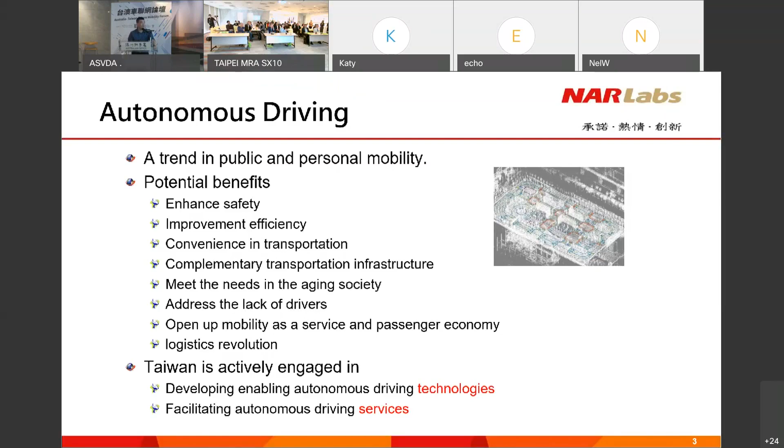However, in Taiwan, efforts are engaged in developing enabling autonomous driving technology and facilitating autonomous driving services. What does that mean? Yes, please.

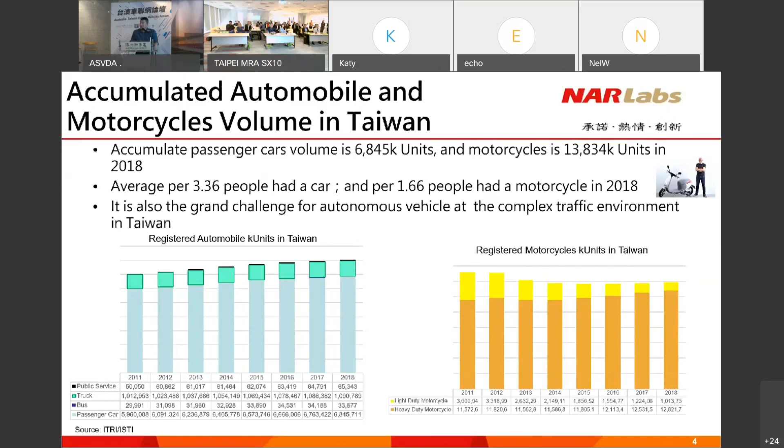This is a statistic result from ITRI. You can see the average: 3 people have a car, and also 1.5 people have a motorcycle. What does that mean?

This is how we deal every day. So we need to deal with car and motorcycle mixing flow. At a traffic light, there are over 200 or 300 motorcycles just behind you. We also have unique transportation equipment, and we also have night markets, flashlights, and people's behavior you can ask them about.

So this kind of traffic scenario, you can see in Taiwan, but not in Europe, or even not in Northeastern Asia, Japan or Korea. They don't have this kind of situation.

This only happens in Taiwan, in China, and in Southeast Asia. But actually in Taiwan, because we only have one car manufacturing company, the advanced Taiwan industry is for electronic devices, ICT industry, and also parts for cars. So if we don't use this opportunity to help our industry develop their ADAS systems or automatic technologies, they can't get into the supply chains in the near future.

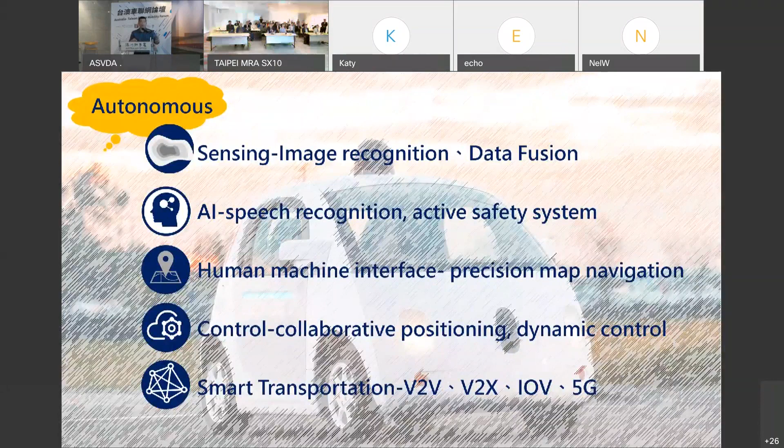Right now we have LiDAR, camera, GPS, and also high definition maps and so on. So what does the data fusion need to deal with, and how can we deal with speech recognition and active safety systems? How can the AI deal with the problem, how can the AI control the car properly? This is a very big issue for autonomous vehicles.

Next, please. For the strategic levels, the value chain development - this is a lack of the dominant OEM or Tier 1 supplier, and we also have a low technology readiness level in some subsystems. And also we have unclear user acceptance for autonomous vehicles.

For tactical levels, this is an environmental and traffic issue for the complicated scenario, highly mixing traffic flow and unpredictable behaviors.

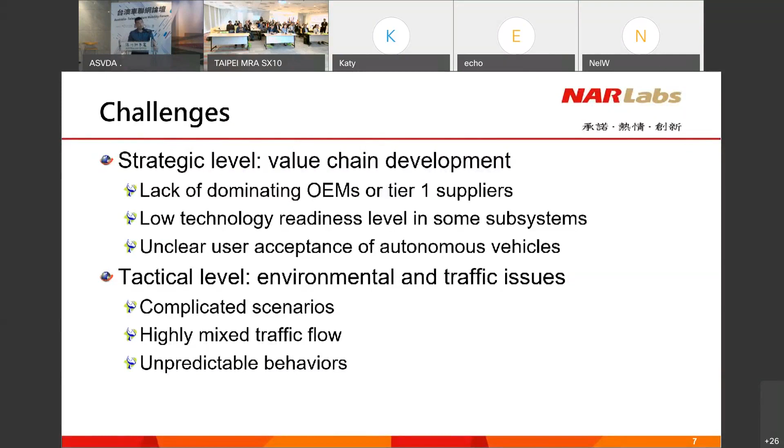And also we need to accumulate data for learning, and also we have experiments in terms of the regulatory sandbox regulation.

So based on this common planning, we have the research institute and also the industry and university combined together to help industry develop autonomous vehicle technology, for all these kinds of issues - the technology, system integration, data analysis, and supply chain, business model, mobility as a service, and also the proving ground.

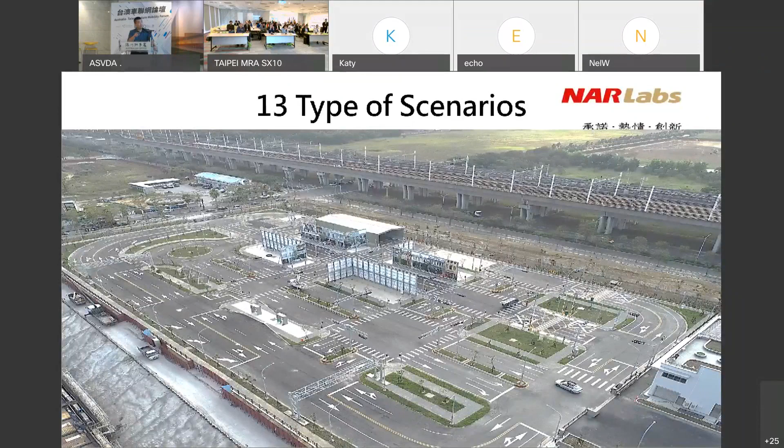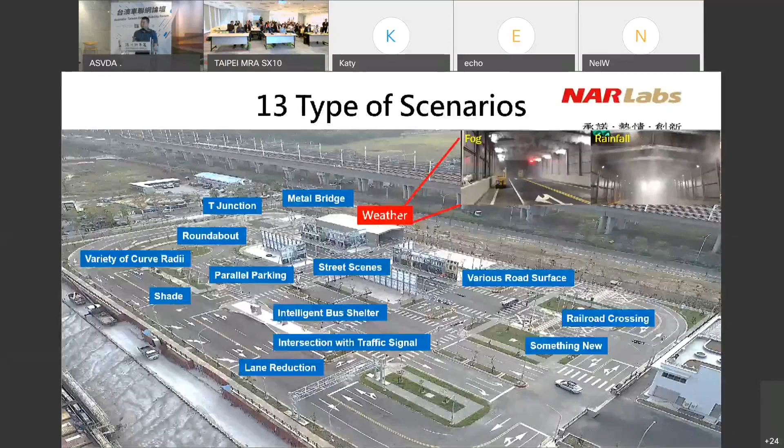So right now, for example, the Qimei electronic company tests their data systems at night, and also in the fog and rainfall system, to see if they can recognize the object in front of you in those kinds of situations.

Next. And not only for the proving ground, we also have 5G, DSRC, and also CV2X communication platform. We also have dynamic testing scenarios, and we have standard equipment suitable for the 2018 Euro NCAP standards.

So this helps our industry - they can do the test in our laboratories, and they can connect to the Europe standard easily.

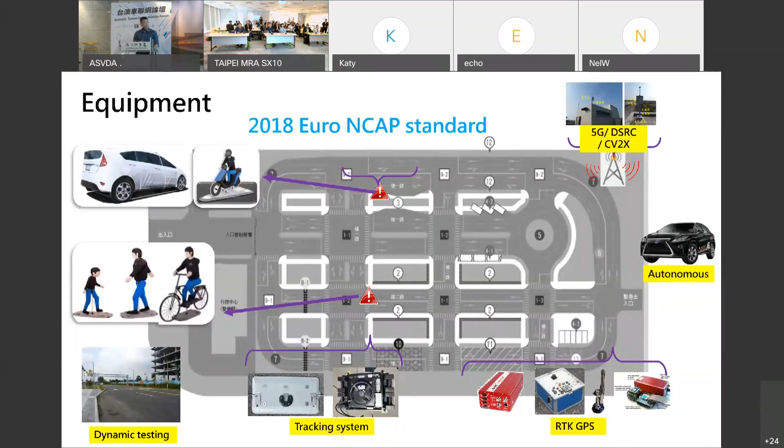So this is a dynamic test scenario. For the motorcycle cut-in on your driveway, and also the mixing flow mode, for the crossover mode and the follow mode, we can use the dynamic equipment to do all kinds of tests. Next, this is one example.

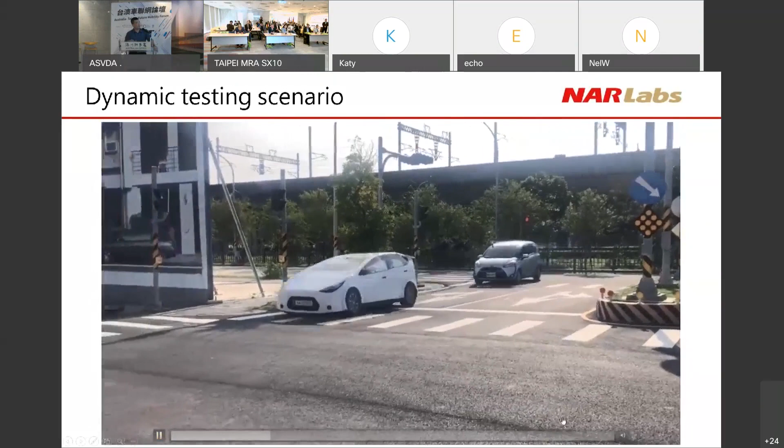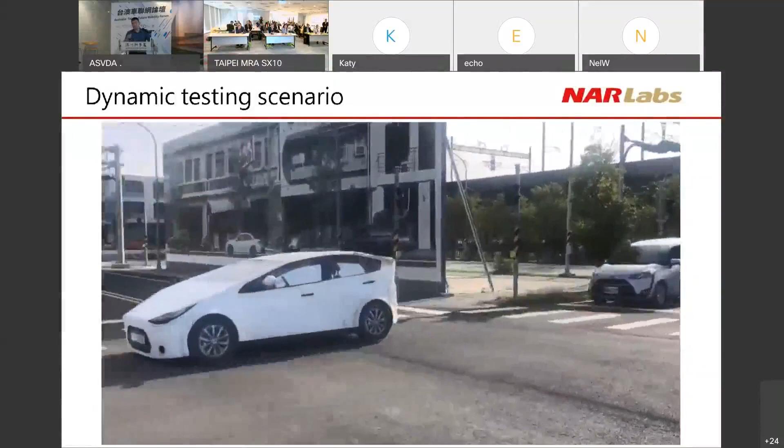So this is the freight car. We just take this because they have an accident in front. So the first car can stay away, but the second car, the automobile, when it recognizes the danger, it can stop. So we can use those kinds of combinations to think about what vehicle can deal with the real Taiwan traffic situation. Okay, next please.

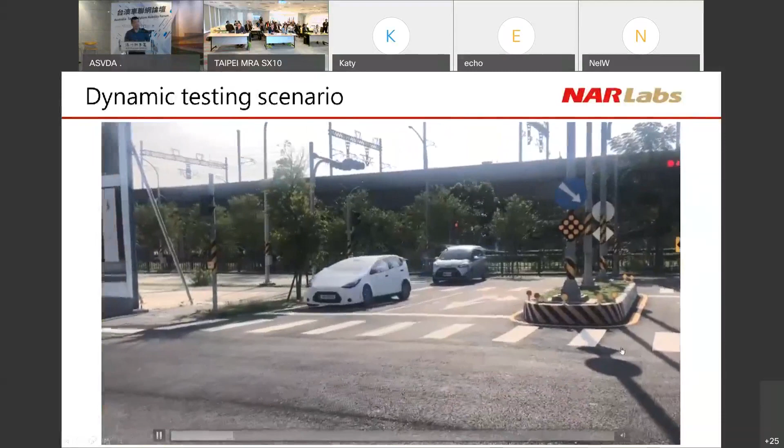Not only for the proving ground, the real proving ground, we also have the mixing traffic flow, accident pattern, and the behavior model in our simulator platform. This simulator platform is a combination with business software, and we are also trying to import the car-motor mixing flow module, the traffic signs, the scooter 3D model, and the common traffic accident patterns in Taiwan.

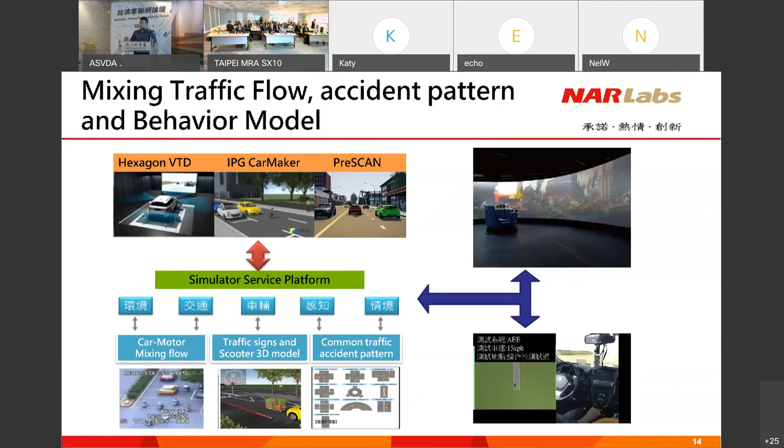This is a static result. So we put all this stuff in the simulator service platform and integrate it into different software. So if university or industry want to test their technology for the first time in a simulation world, they can use our service platform to do the test. And then if they can pass all these tests, they can put it into the car and go to our proving ground to do the real test.

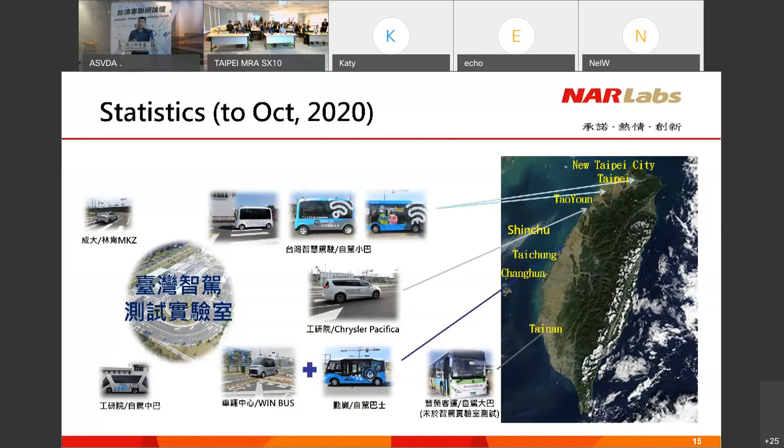So as Ms. Chen just mentioned earlier, right now in New Taipei City, Taipei, Taoyuan, Hsinchu, Taichung, Changhua, Tainan, there are a lot of companies and industries doing tests, because they get into our laboratory and get the test report to get the authority to drive on public roads. So as you can see, mostly it's for public transportation. This is also the Taiwan policy direction right now - we are encouraging a business model to see how the autonomous vehicle can help deal with the public transportation issue.

Next. So Taiwan Car Lab is a platform just between the R&D institute and also the industry. The industry can test their car, their electronic devices, or the ADAS system in our laboratories. And if they have any question or some bottleneck, we can connect them to...

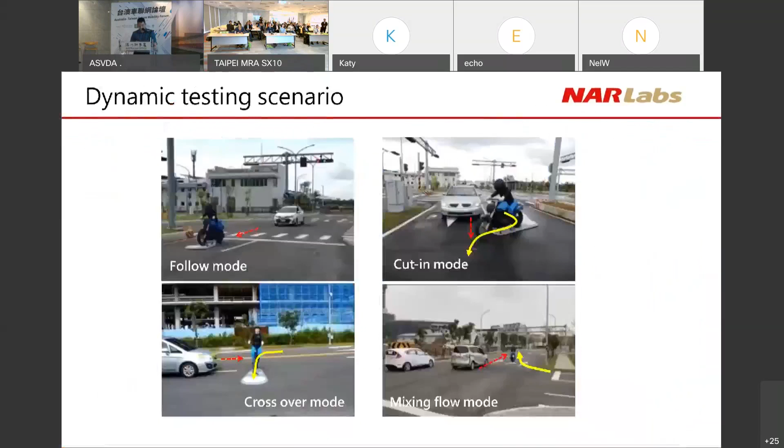So this is all I have today. Thank you very much.

Thank you very much, Dr. Zhang. I would like to say that you did miss one of the benefits of autonomous vehicles. For me, the biggest benefit is I won't need to keep paying my wife's parking fines and speeding fines if there are autonomous vehicles.

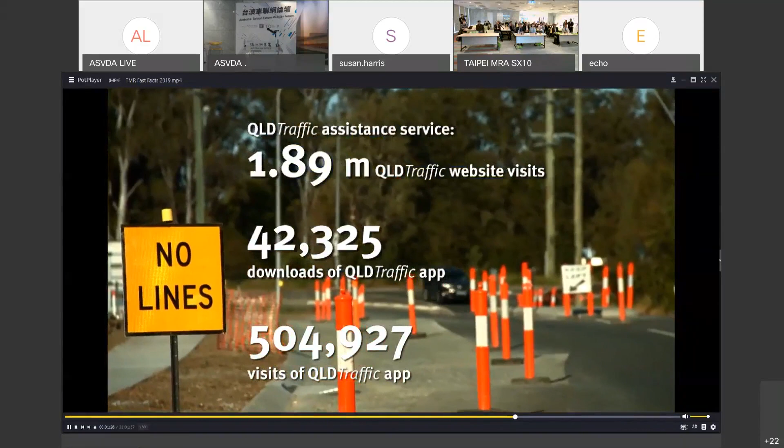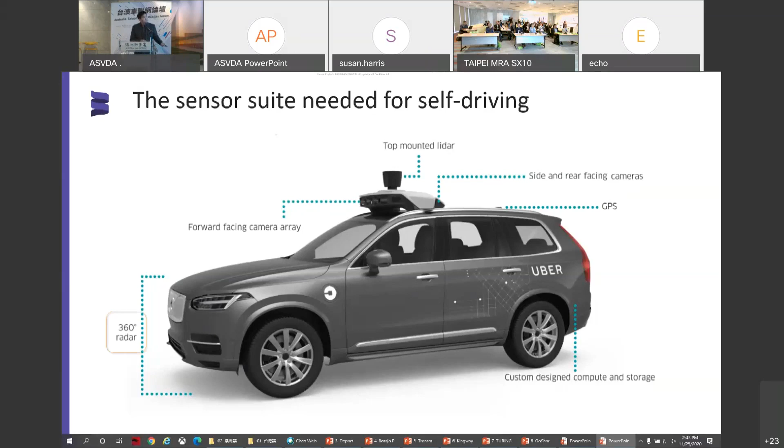So here is a typical example of what a LiDAR actually outputs. The data that you get and visualize, this is what it looks like—it's a bunch of points taken from your environment. I won't go into the details about the technology aspect, but visually this is what it looks like.

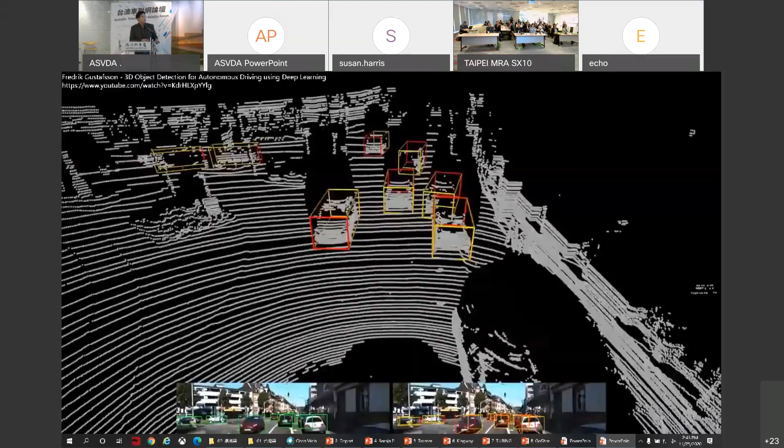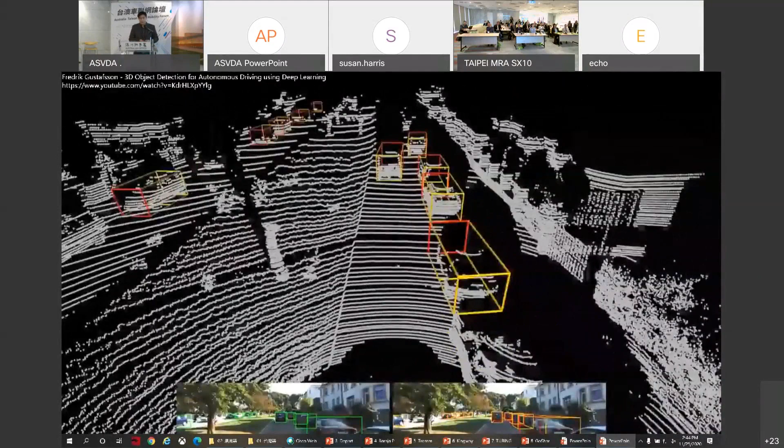So as you see, as a car moves and the sensor is collecting data, you'll be able to perceive or extract images from it, and those bounding boxes are identifying vehicles. So this is not our LiDAR, this is a Velodyne LiDAR. It was taken, I think, many years ago.

What is the current state of LiDAR? If you're not familiar with LiDAR, there's roughly about 100-odd companies doing LiDAR globally. So there's a lot, however they're all a little bit different. The iPhone 12 was just announced, and a LiDAR is actually in that mobile phone, so LiDAR is getting more prevalent across many different sectors.

Now, in our sector, the automotive or mobility sector, the current state of LiDAR, there's three things that are problematic or challenging that have yet to be solved. The first is range - you have to be able to see very far.

Now I have colleagues here today that will be talking about buses and shuttles, and they use LiDAR as well. But if you're talking about the entire mobility space, you have to think about all driving scenarios, including highways and faster speeds, in which you will have to see long ranges, so that you have proper response times for safety.

Second is resolution, of course. You have to have enough resolution to be able to, in the first place, detect the objects, and then to be able to classify them. So resolution, or more resolution, is needed from a LiDAR sensor.

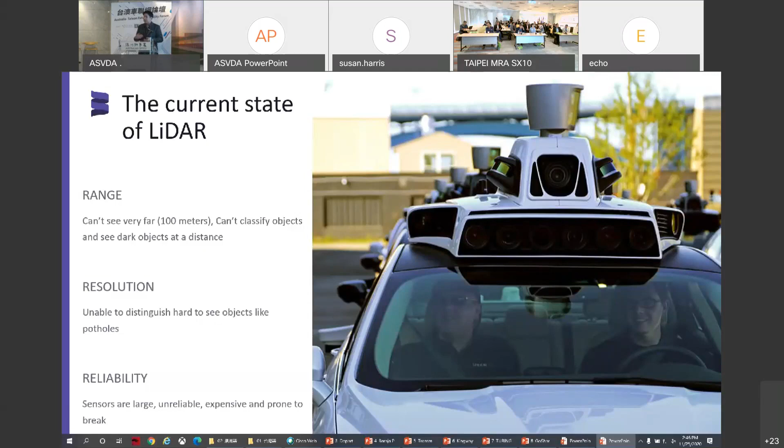And finally, reliability. Everybody understands that automotive, first and foremost, is about safety, so you have to have a reliable sensor that's fail-safe in order to ensure safety. The traditional LiDARs, these big mechanical spinning buckets - I like to call them that - granted they work, however they are not designed for reliability. I think in our small LiDAR industry there's a general consensus that this is good for testing, but not good for mass production at scale.

So what does Baraja do? How do we differentiate? There's many different ways to create a LiDAR, and it's all about how you scan your environment, or how you scan the light in your environment. We invented a technique called spectrum scan. It's a complete new innovation that really no other company is doing.

A general idea of the concept, this is a little video. So what do we do? It's actually quite easy to comprehend.

We learned in school that when white light hits a prism, it refracts into different colors. Every color is a different wavelength of light, and when a different color of light hits a prism, it'll have a different refractive angle that comes out of it. Essentially, what we do is we harness this physics principle of light to create the scan. So we use a laser that can change color very, very quickly, and we combine that with a prism-like optical design. Of course, we aren't in the visible spectrum, we're in the infrared spectrum, 1550 nanometers to be exact. That's essentially how we scan our light throughout the environment.

Now, how is that different from those mechanical spinning ones? Well, first and foremost, there's nothing moving. So when nothing is moving, it creates a much more reliable solution. If you think about a vehicle, the thing vibrates - there's a lot of temperatures you have to drive through, and a lot of shock that has to be considered.

And when you have a moving part that's also very sensitive and imperative for safety, you need to have some new innovations to make it more reliable, more robust - in our industry, automotive grade.

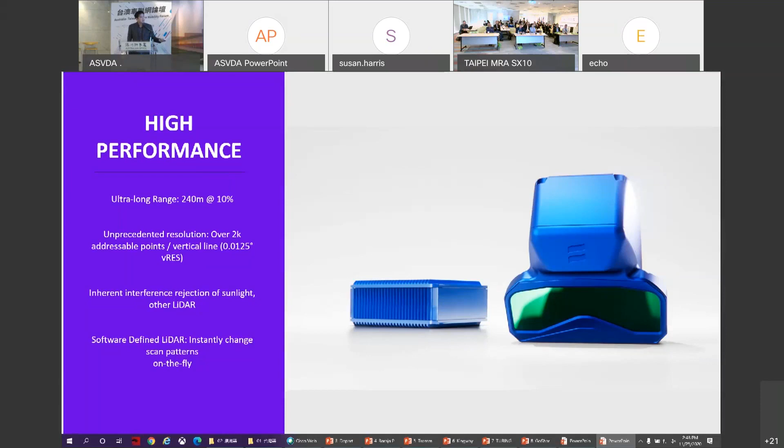Here's a little understanding about our technology and how we revolutionized the resolution aspect of a LiDAR. So just now you saw the video of how it works. We use a prism to scan the free space. Now, if we look inside the prism, what's actually happening? Every wavelength of light that we are actually outputting is actually one line of resolution. And because of this, we actually are able to change our scan pattern frame to frame dynamically, very reliably, with very low latency, without any moving parts.

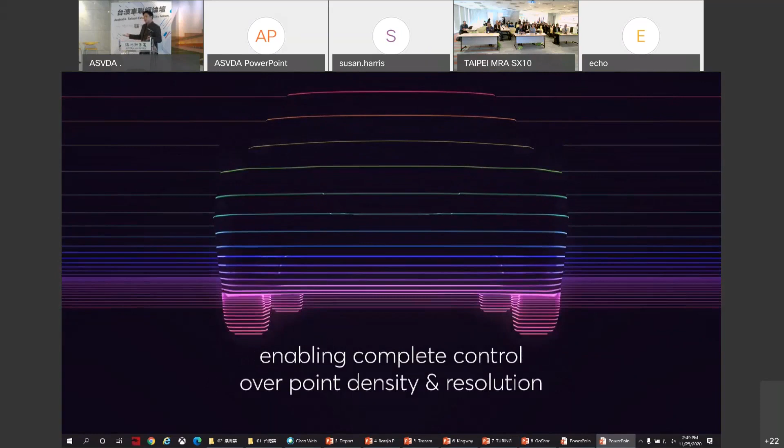At any particular time, we can say we need to scan in an urban environment, let's say, we need to scan over 120 lines, because we need to see everything. But then when you come onto the highway, maybe just like a human being, you don't need to see everything. You're only really focusing on what's in front of you, on the horizon. But what you can do then is very quickly, without any moving parts, through software, just change your scan pattern so that you have more resolution ready to use.

So Baraja has a very configurable system, a very versatile, a very flexible system that can adapt to different driving use cases. And it's also this reason why we've been able to penetrate different markets. Yes, we are in the automotive industry, but we're also in the mining industry. We're also in the infrastructure industry. So we are able to be applicable to many different industries because of the adaptation of our product.

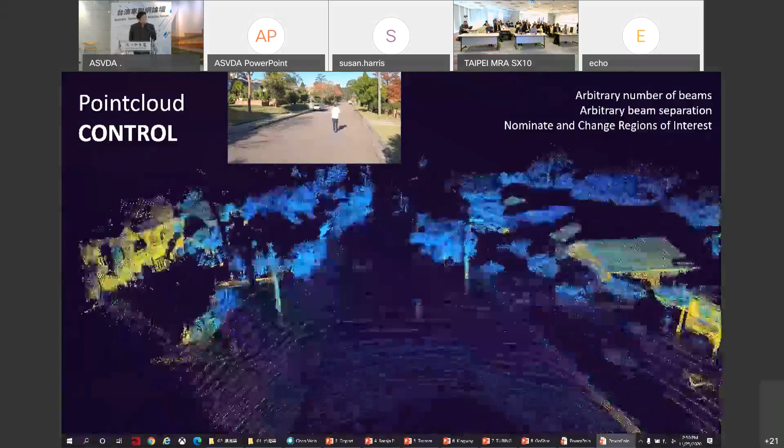This is what one of our point clouds look like. This is a quick understanding, and as you can see, we can change the density of the points and the resolution along the field of view very, very quickly.

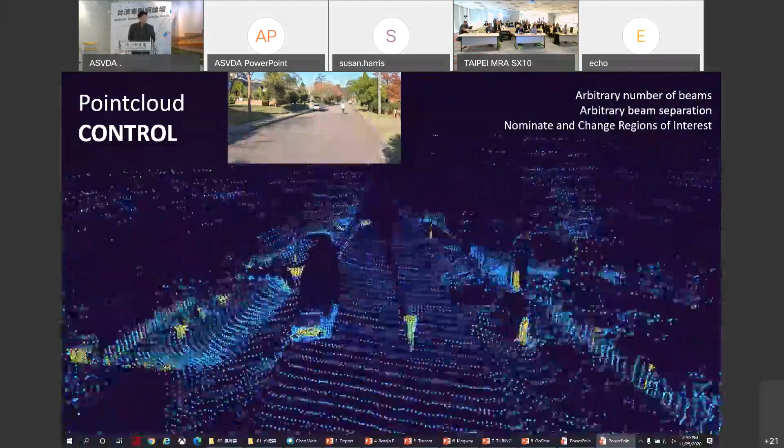So that's one of my colleagues walking on the road somewhere, Chatswood or something.

Well, now the other thing that's really unique is that we are a modular system. Earlier you saw that big picture with this big box spinning bucket thing. Recently there are new innovations that are just one box with a circular, rectangular box. We are a modular system. What does that mean? We separated our laser from our optics. And why is that good? Well, number one, it's more reliable.

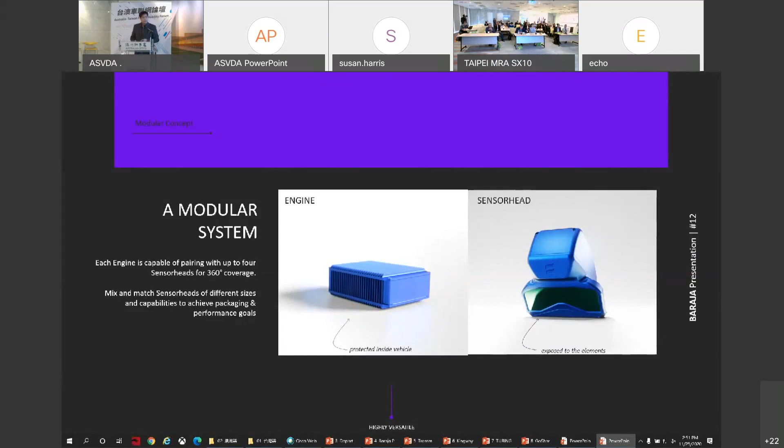The laser is always the most sensitive part of your LiDAR system. The fact that we separated it means that you can situate or place your laser or your engine somewhere more safe in the vehicle. Most of our customers place it next to the computer system, where you can leverage the cooling and thermal. The sensor head, on the other hand, can be placed outside of the vehicle or redesigned or repackaged in some way to fit inside the vehicle, behind the windshield, embedded into a headlamp, etc. So it has that versatility and also the reliability.

And we can also redesign the sensor head or redesign the optics to fit different OEMs or different car models design. So granted, all these robo-taxis that you've been seeing around, they're pretty ugly. We're retrofitting existing vehicles. But in the long term, we're thinking, a Mercedes shouldn't have a big bucket on top of its roof. They obviously know that, and aesthetics means something in the automotive industry. So being able to redesign your LiDAR to fit the design of a vehicle, not make it just good looking, but also reliable, is important. And we are able to do that more easily than most others.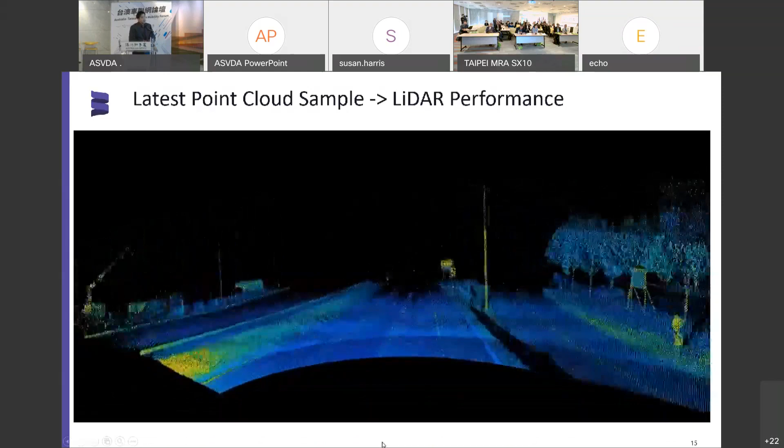Recently, we've been able to enhance and develop our system to near camera-like resolution quality. This is absolutely imperative and important for people working on self-driving software because they need to be able to see clearly. You can imagine misidentifying a sign for a person - famously, 2 years ago, Uber had an accident where they missed a crossing pedestrian on a bicycle. Things like that need performance like this.

This is somewhere in Silicon Valley.

So in conclusion, basically, Baraha is a LiDAR innovative company. I've had the benefit of being Taiwanese myself. My home is here, and I've recently been able to establish partnerships. And we foresee going forward, there's a lot of opportunities.

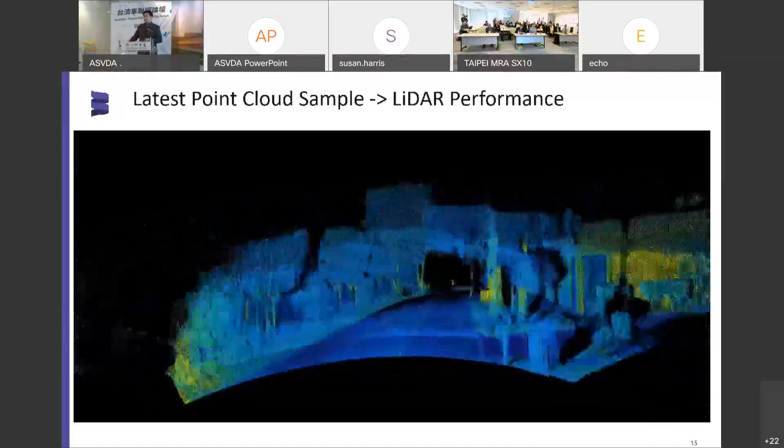I think I'll leave with this comment. The automotive industry is going through a paradigm shift. I think it's quite obvious that everybody, including the traditional automotive companies, sees this. You see about it every day. GM made an announcement 2 weeks ago that they're putting an additional $27 billion into EV and AV. And everybody's got this Tesla craze. New EV companies coming every day.

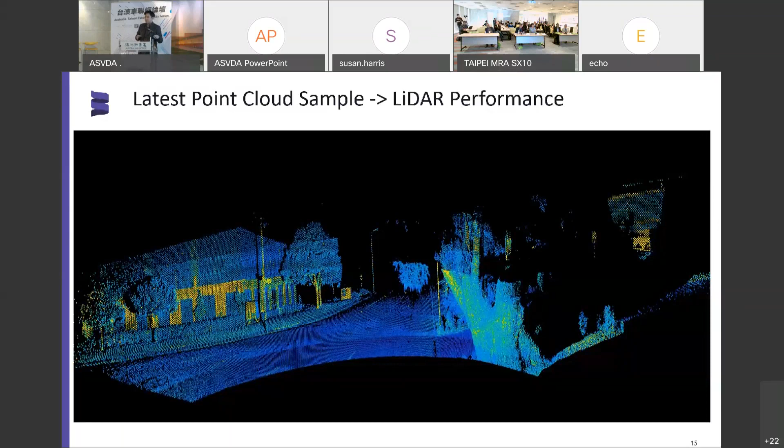Now, why I say this is important for Taiwan and where I see the opportunity is that going from a traditional automotive to an EV vehicle plays into Taiwan's traditional strengths very well, because we have a very good ICT supply chain. It's not about your transmission anymore, it's about your battery. It's not about your steering or power steering, it's now about your ECU, your computer, or your ASICs inside the vehicle. So there's a lot of opportunity in Taiwan from a supply chain standpoint that can integrate with the automotive industry, especially the AV industry. I look forward to having those opportunities and working with different Taiwan companies as we move forward.

Baraha is a small company, but we are, I believe, a very strong company in this technology space. Thank you very much.

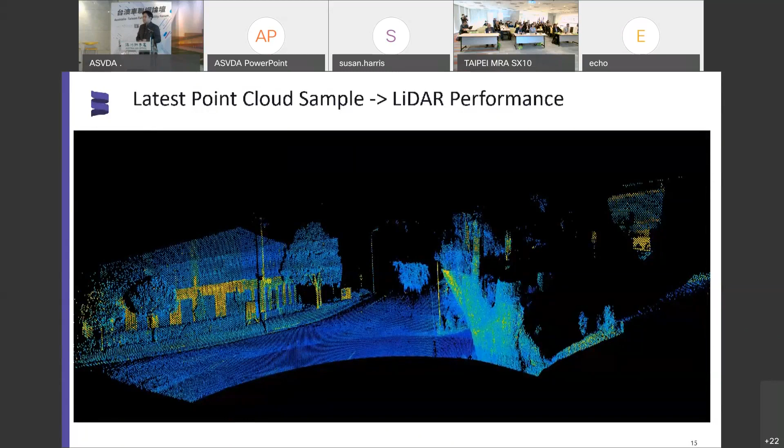Thank you, Doctor, for this excellent presentation. You have two clients here, Turin and Kingway Tech. I think very impressive. I believe Miranda has already arrived in Taiwan. Hello again. Yes, please.

Okay, if we can move to the third slide, next one. So quickly about the Cooperative and Automated Vehicle Initiative: it's essentially to unpack cooperative and automated vehicle technologies to determine whether they can contribute to our vision of zero road deaths and serious injuries in Queensland.

In order to do this, we've developed a series of pilot projects using a variety of technology. The objectives are to validate the safety impacts and user perception by demonstrating the technologies publicly. We also want to grow the department and government's technical and organisational readiness, so we know what we need to do from an infrastructure perspective to deploy and support deployment of the technology, encourage partnerships, and build capability in the local private sector. Next slide.

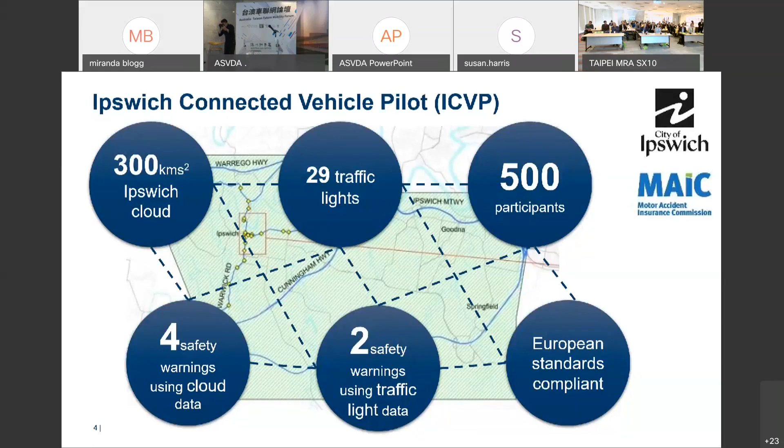So we've built this system to be compliant with European standards. Most vehicles in Australia are European compliant, so that's in line with their requests and wishes within Australia too. Next slide.

As mentioned, this wasn't really possible without the technology knowledge of a number of vendors. The cloud, the central station, has been developed on an Amazon platform with Transmax and WSP. Transmax is a presenter in today's session. We have a security credential management system which enables vehicles to sign messages that can then be securely shared between the vehicles and the infrastructure, using Integrity Security Services in partnership with the Australian federal government.

We have Telstra, our telecommunications provider, who provide a range of services including at the core 3G, 4G. Cohda Wireless is providing the vehicle stations and display tablets, and Kapsch is providing our roadside stations, which again communicate via that 5.9. It's not really possible for us to achieve this outcome without these vendors, and we've explored a range of new elements in the standards that have pushed their products as well. Next slide.

We have collaborated with Lexus and Toyota. They prepared a couple of demonstration vehicles using the Ipswich test bed to test the connected vehicle applications. They had several vehicle-to-vehicle applications in addition to the vehicle-to-infrastructure applications we are piloting with the 500-odd participants. Both TMR and Ipswich have really spent a lot of time supporting Lexus and helping their product develop and grow. Next slide.

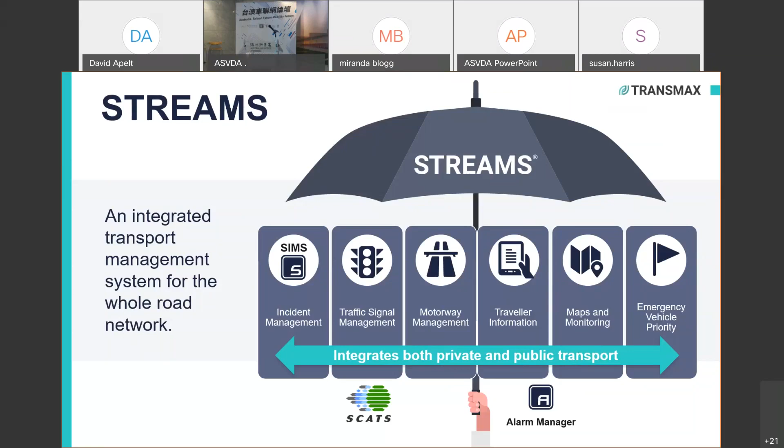So our flagship product, STREAMS, is running throughout much of Australia, but only recently was it turned on a freeway in Western Australia called the Kwinana Freeway. The Smart Motorways product features ramp signal management using the ALINEA hero algorithm, which is world's best practice, followed by lane use management, variable speed limit signs on gantries and pylons beside the road, and traveller information.

And on top of that, in Queensland at least, we have a number of algorithms running on top of the freeway, identifying queues that are forming and slowing down vehicles along the freeway in anticipation of those queues forming, but also constantly monitoring the freeway to prevent the formation of the queues in the first place.

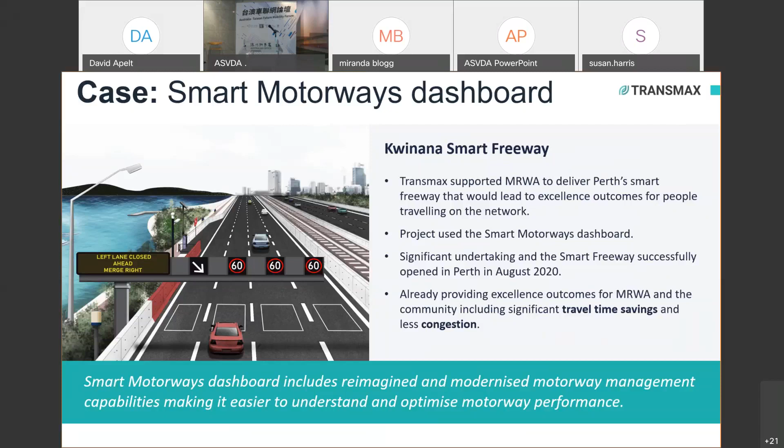The people over in Western Australia, the team there did a great job. Not only was it civil engineering works, but the rollout of the ITS was a big public information campaign as well, and there was a lot of great support for this initiative. Anecdotally too, the information coming through from the public through talkback radio was very, very positive. People were turning up to work early, and they were surprised about how quickly they were getting to work.

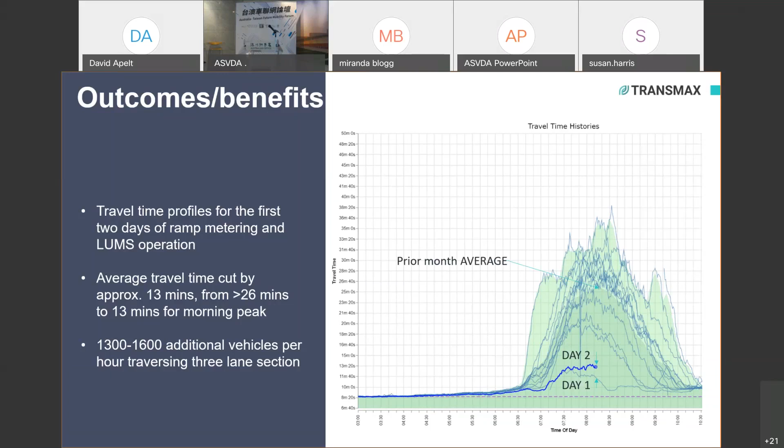One other thing about our roadmap: we're particularly interested in the future of Streams, because as an integration platform we have access to freeways and all the software to run the traffic lights as well. We're very interested in taking a very holistic and high-level approach to the management of the entire network. We wish to move to a concept we call policy-based network operations, in which we can provide very high-level levers and dials to politicians and policymakers so that they can define high-level objective functions to be run at different geographies throughout the network based on time of day or day of week.

But you can imagine in Queensland, we have a number of very significant ports, and so heavy vehicle priority might be a priority around the ports.

So how do we architect our product streams so that we can define objective functions based on time of day or day of week in those areas, and then allow the rest of the system, through a very distributive architecture, to apply those policies down at the tactical level, down at the traffic lights. The important thing is to measure the impacts and feed it back in, because sometimes a change in one area will impact a different area unexpectedly. That's the direction we're heading in.

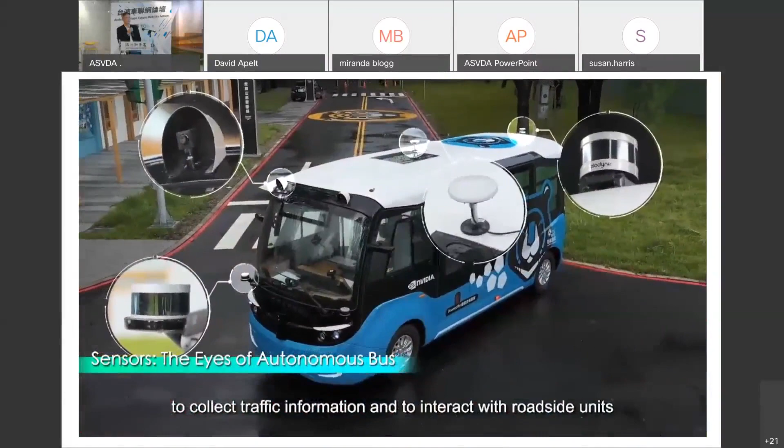The autonomous technology developed by Kingwaytek Technology is displayed in Taoyuan Hutoushan Innovation Hub. All the vehicles in the hub are equipped with a range of sensors to collect traffic information and interact with roadside units. With the aid of HD maps, the vehicles are able to understand their precise position.

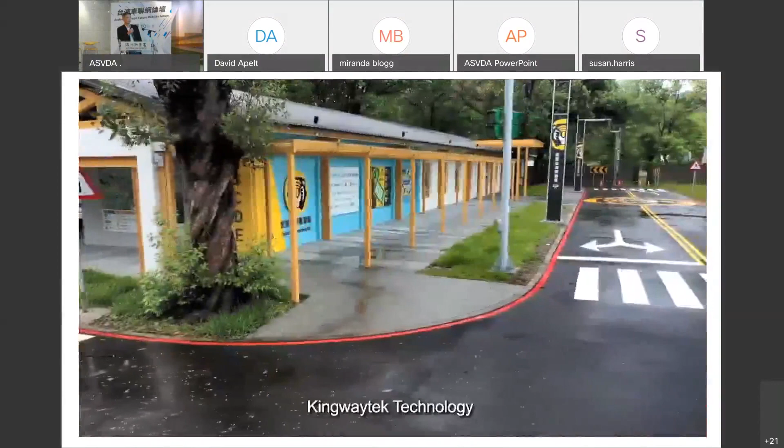We also develop multi-vehicle control and follow-up technology. Kingwaytek Technology has created an autonomous vehicle simulation software in the hub. The software provides various testing scenarios for vehicles to learn and can greatly reduce the time spent in field tests.

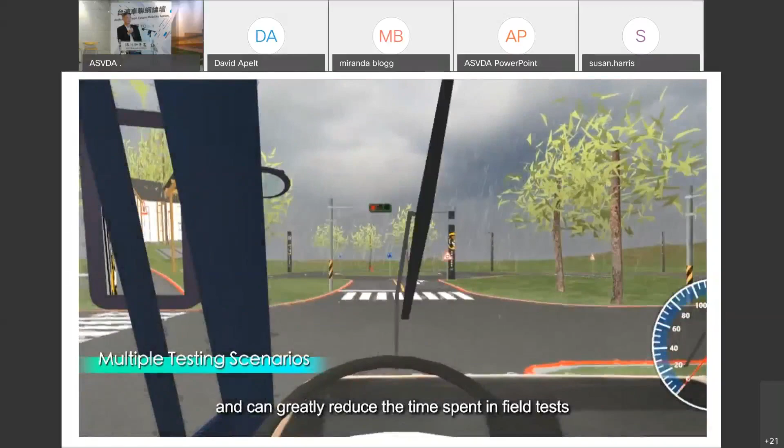The clustering of autonomous vehicle-related businesses in Taoyuan Hutoushan Innovation Hub creates a great environment for developing and testing the vehicles. Moreover, the place serves as an experimental ground for applying 5G, V2X, and telematics, demonstrating the communication of V2B and V2V.

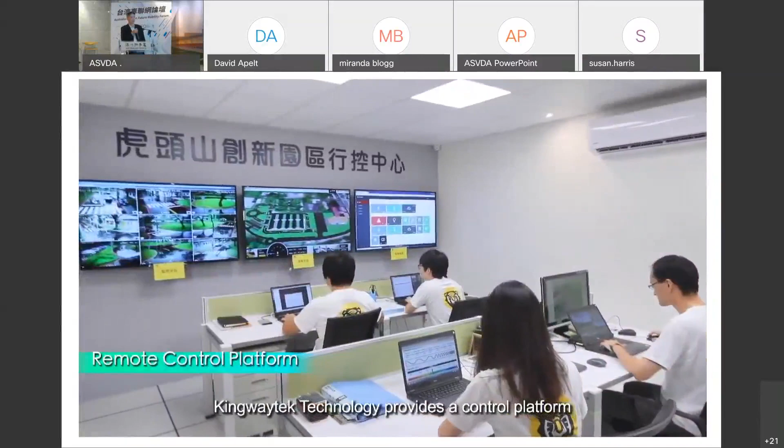Kingwaytek Technology provides a control platform to monitor the status and control parameters of all autonomous vehicles. Based on this information, the controller can dispatch or recall the vehicle immediately. In the coming age of 5G, high-speed data transmission will increase the data processing speed and the safety of autonomous vehicles. Soon, the vehicle will be able to run on the road.

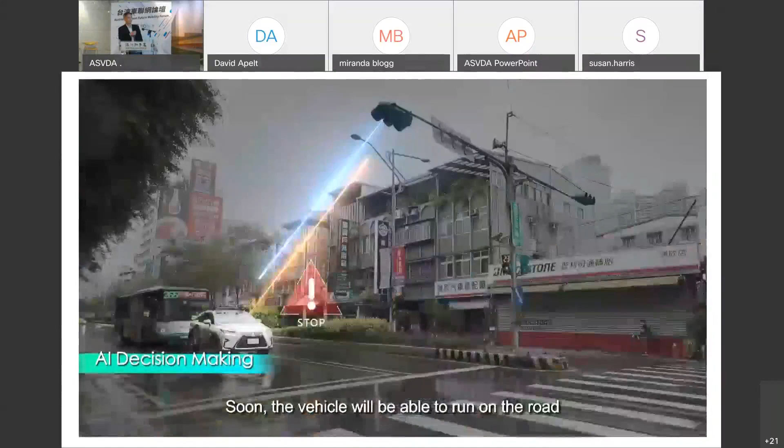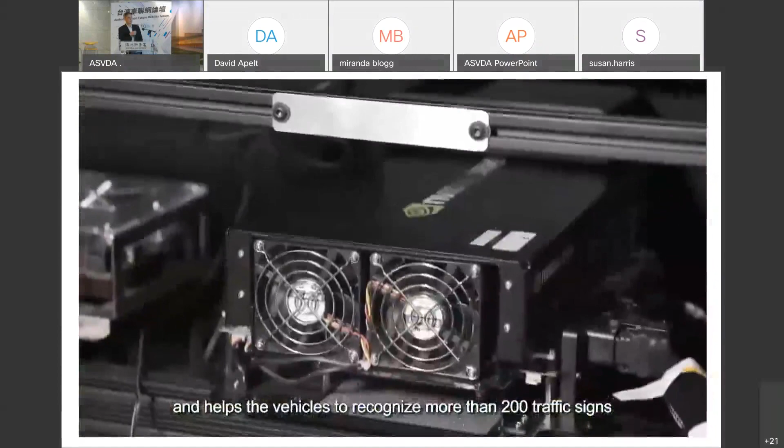AI camera offers faster image processing for autonomous vehicles and helps the vehicles recognize more than 200 traffic signs. Our decision-making system for autonomous vehicles can quickly detect upcoming obstacles in front of the vehicle and inform the braking system to stop or detour.

In the future, the autonomous bus can be used to support public transportation according to people's needs and will bring great convenience to society. Autonomous vehicles can also be applied in logistics and transportation services. Combining the vehicle and cloud computing solutions, we can ensure accuracy in forecasting future traffic flow and make shipments arrive faster. Soon, you can control an autonomous vehicle by simply pressing a button, and the vehicle will automatically drive to your side.

Leading through smart driving. Kingwaytek Technology.

I think Kingwaytek is always focused on enabling the intelligent operating system, and we would like to empower the development of the smart city. With Kingwaytek, there is no limit to the innovation and to the service to our clients. So I would like to look for any cooperation opportunity with Australia. This is my speech. Thank you.

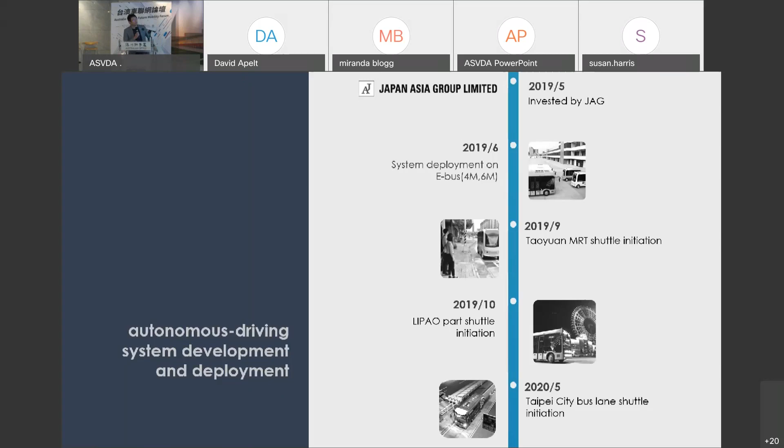Of course, we don't do everything by ourselves. As you can see, Turing Drive situates at the center of the ecosystem. We integrate with other hardware from the system part. Our key partners include Tron Energy, an e-bus maker in Taiwan, NVIDIA, which I bet you all know, and other famous companies at home and abroad.

For the sensors, I would say we use whatever is cheap and reliable, so I already met a potential partner here. And we work with our Japanese shareholder KKC on the HD map production.

But what do we really do? We don't do level 5 autonomous driving in all conditions. Instead, we would like to focus on the pain points of smart cities or smart sites here and there. A lot of sites are not being run efficiently these days because we don't get real-time information from many other environmental inputs, for example traffic flow, traffic signals, or other interference. The aim for many of us is to really create a very efficient and safe condition, a smart city where all information is connected and shared.

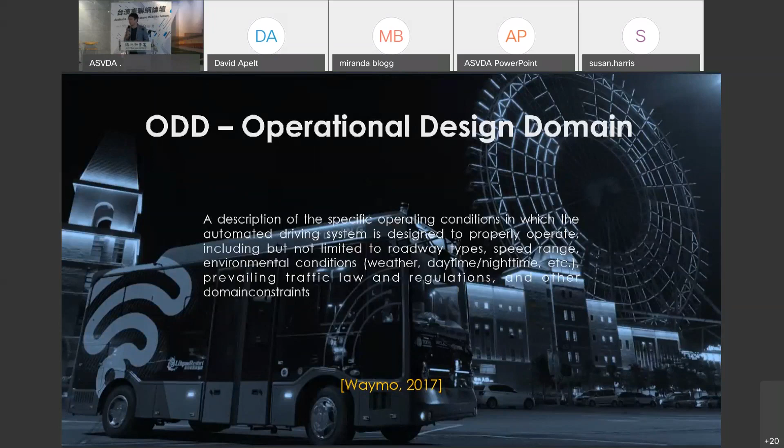And we didn't invent this term. It was proposed by Waymo, Google's company. Today, a lot of AV developers around the world have realized that ODDs would be the really realistic, reasonable, and probably profitable goal to achieve.

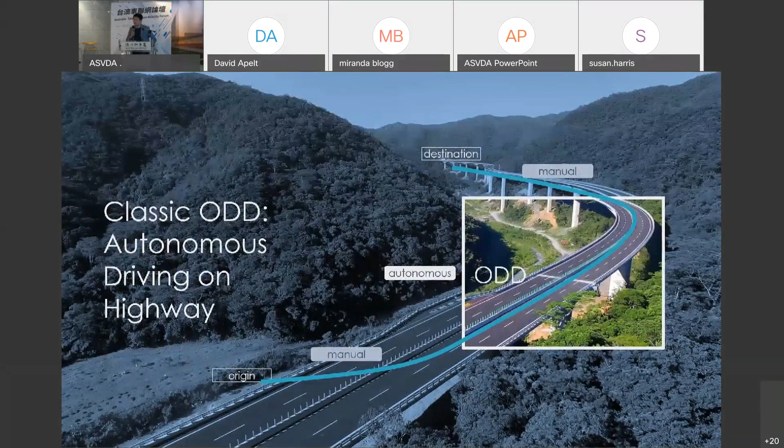One example of ODD is self-driving during a segment on the highway. That's the part we are confident in doing AV. Otherwise, we'll use manual driving.

So Turing Drive actually produces the autonomous driving system that can be applied to various types of vehicles. We don't provide the vehicles, we don't make the vehicles. This system can be operated in many kinds of ODDs. This is our goal.

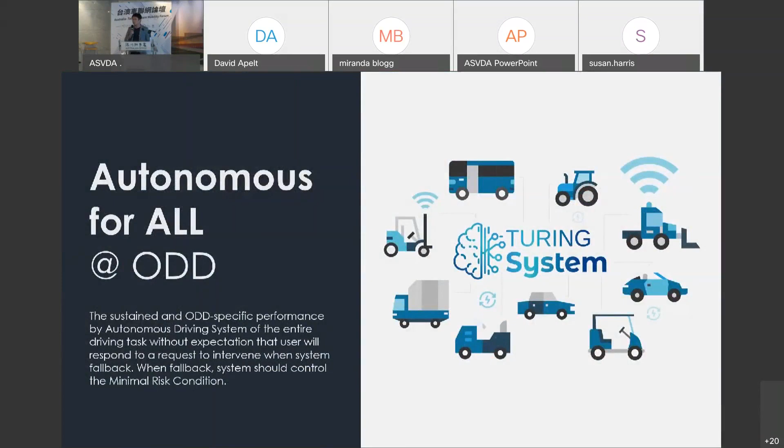But ODDs are not easy. There are a lot of challenging conditions in these sites. For example, GPS signals can be poor, the roads or drivable area may not be clear, or sometimes you have to deal with indoor positioning, or there are blind spots in these particular environments. You also have to deal with strange people behavior, driver behavior in these conditions.

Still, we believe that autonomy is the solution to enhance efficiency and safety in these ODDs. What we can help with is installing the system on special purpose vehicles, like golf carts, cargo shippers, and so on.

What we exactly provide is a set of autonomous driving software, hardware, and SDKs. We call them the Turing Drive Kit or package for vehicle operators or vehicle makers. With this package, we can make their existing products autonomous ones.

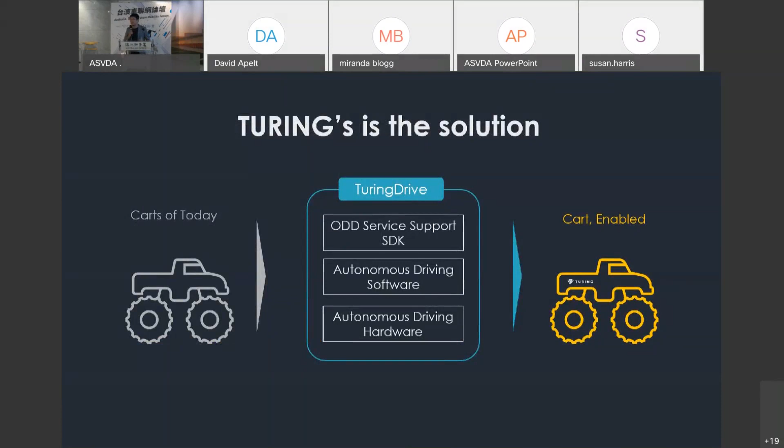This would bring about tremendous benefits to site owners or fleet managers, because they can definitely save at least 40% of human resource costs, and with a little bit more, they only have to pay a little bit more on the vehicles. What they get finally is safety and efficiency.

A little bit more details about our products. These are the software and hardware packages or modules in our solution. If you see the bottom line about the vehicle, you will find that we only control a part of the vehicle. We will send the command to the vehicle platform, and then we work with the vehicle maker or vehicle body maker to provide different solutions for different ODDs.

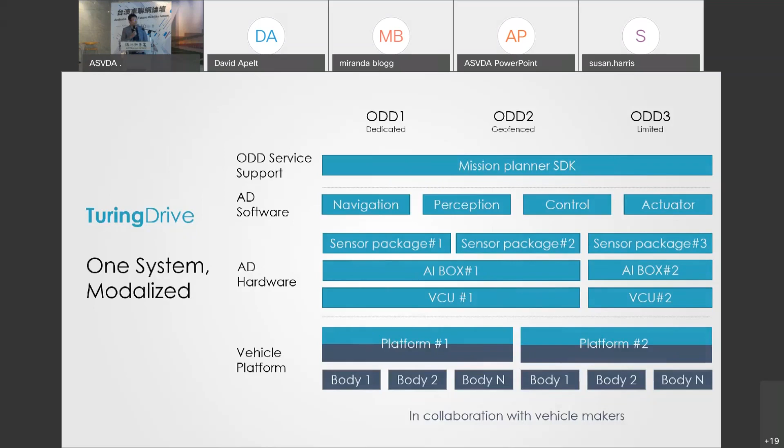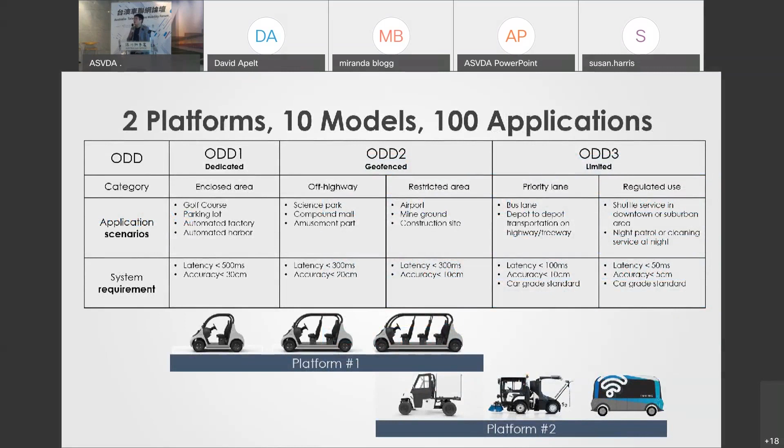Starting from next year, we would focus on two vehicle platforms. One being adopted in rather confined areas, serving low-speed driving conditions, and the other platform will target car grade certification, more robust road conditions, and faster operating speed.

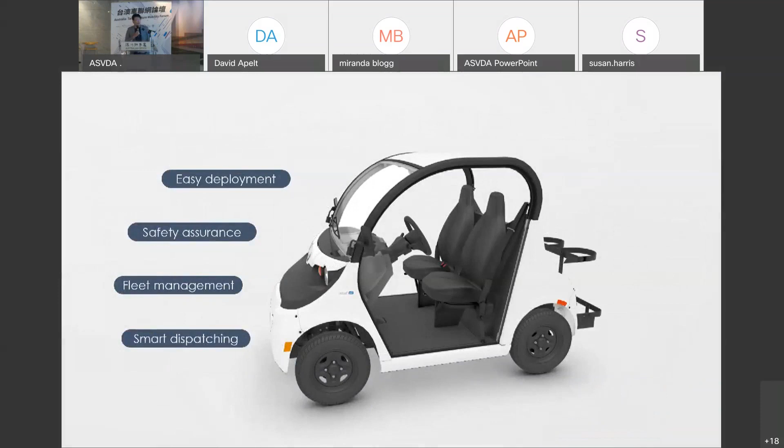This kind of vehicle can be easily deployed with enough safety assurance for ODDs. And it's not just one particular type of vehicle. With the same vehicle platform, we can build hundreds of kinds of vehicle bodies to suit site owners' needs.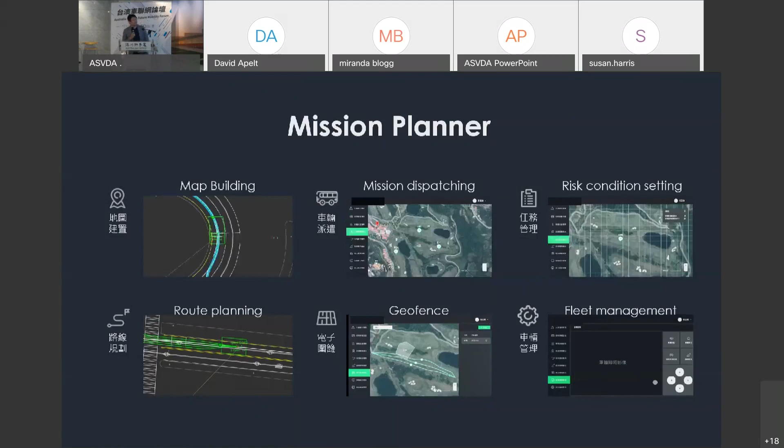We have developed our own autonomous operation and control center or mission planner that satisfies the basic needs of fleet management and can also control the vehicles or the fleet from the center. The point is, we want to optimize the operation efficiency of any site by collecting data and optimizing the algorithm.

Finally, let me tell you how we've been working on the ODDs ever since day one.

The first project that we did, or the founding members did, was a confined area operation in Taoyuan Agriculture Expo. At that time, the company was not established yet. We did this project under the leadership of Professor Zhang and in collaboration with King Wei. Soon after this success, we decided to found the company, and we did some more projects.

And then we run 3 routes in an amusement park in central Taiwan. This is a perfect ODD with various types of scenarios like hotels, parking lot, outlet mall, and a racing track. We learned a lot from here.

Next one. And then we have been commissioned by a golf club in northern Taiwan to build fully autonomous golf carts. We would say that it might achieve level 4.5 or a little bit higher in this kind of ODD, which is golf course. We are very excited about this project.

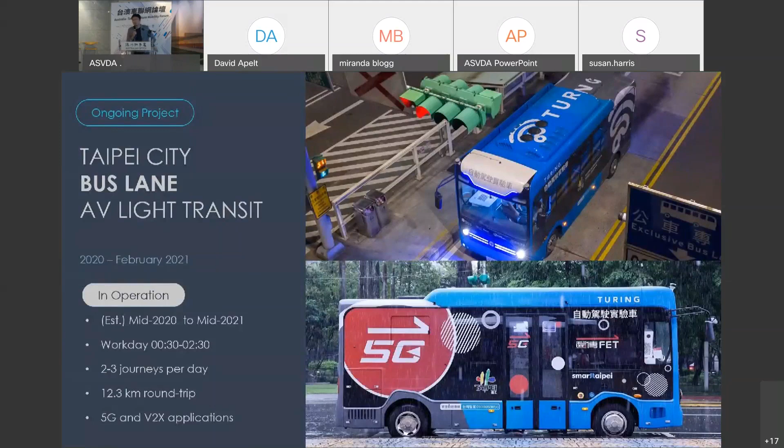And with the experience from this type of ODD, we can quickly expand the network to at least all other major bus lanes in Taipei and in other remote, suburban areas in Taiwan, as long as there are dedicated lanes.

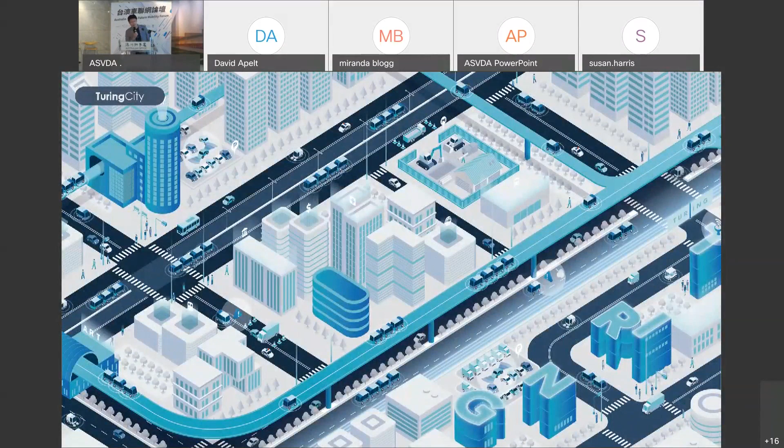We hope that one day, in a smart city optimized site, there are at least tens or hundreds of types of AVs with Turing Drive inside, and that's our mission. So in short, Turing Drive believes that autonomous systems can solve a lot of problems at ODDs, and we will keep doing that. Thank you very much.

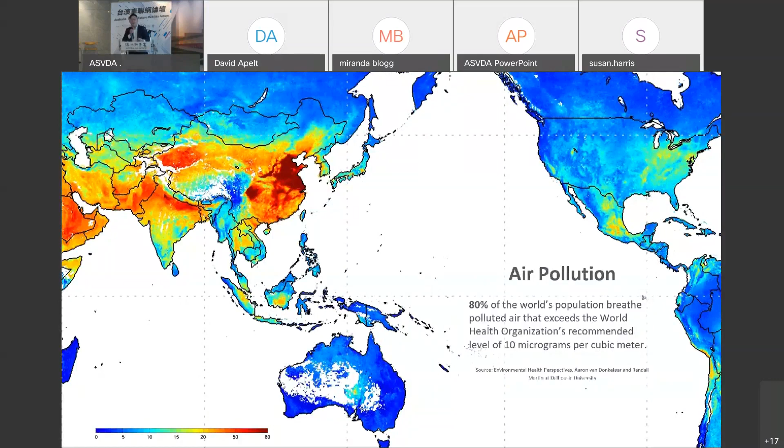And for all this kind of gathering, the other situation we are facing is that, from the WHO, over 80% of people are breathing air that is not good and not healthy for our body, over 80% of us. And that includes you and me in this world, and also including Jakarta, New Delhi, and Beijing.

We know that the situation happening now is that in this kind of megacity, people's economic behavior and interactions, and actually mobility is something that results in all these kinds of situations. So for carbon emissions and all these kinds of pollution, mobility accounts for over 30% of all this kind of pollution. This is a situation we need to face.

And also, we are seeing in these megacities some situations now: we've got traffic congestion, and they also have bad, insufficient infrastructure, which mostly happens in Southeast Asia and developing countries. The third one would be the rapid growth of population. We are growing too fast, but we don't have sufficient solutions for this kind of mobility need.

So it comes to the vision of Gogoro. Oh, the vision just gone.

So the vision is that we want to build cleaner and smarter cities, not just for the commercial side. It's almost what we are working for every day. So the reason why we're working for this company is that every revenue we earn, all the money, the revenue we have, is all built on environmental friendly issues or impact. So this is what we have been working for.

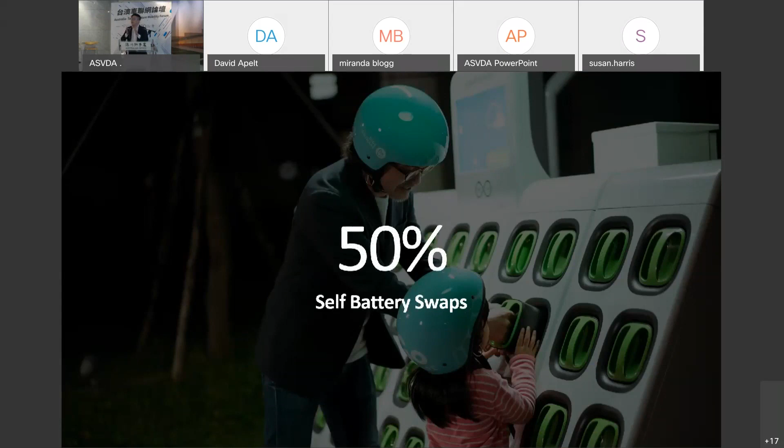For GoShare, we think it is the fastest way to mass adoption of the electric revolution. This means that many people want to implement or deploy smart city, smart mobility solutions, and during COVID, more people have been emphasizing mobility as a service and this kind of sharing mobility. For smart mobility or electric vehicle usage, GoShare and this kind of sharing path would be the fastest and greatest way to adopt these solutions to supplement the transportation cities already have.